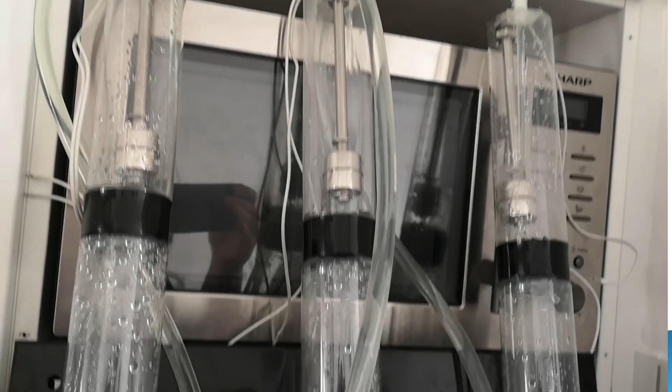Once we were in progress of building that lab, I think we were pretty much halfway already. You've seen it just in action now.

We were contacted by one of our partners, CWD in the Netherlands, and they got to talk to Rijkswaterstaat, which is the Ministry of Infrastructure and Water Management in the Netherlands. They required a model or a lab environment for their forensics team to train their techniques and develop some of the skills they need in their field of expertise. One of the things they do in the Netherlands is operate bascule bridges, for example. So this was a prime example for us to use as a model, because it's something we can get an idea of how it's working.

The strict requirements were having a mobile solution, because they wanted to move it between sites. And then, of course, come with a workshop that is scenario-based. So the bascule bridge we were meant to build should be used in a way that is versatile enough to run different scenarios for different forensic teams, for example.

And this is where the journey began of building this bridge. Moritz is going to run you through the concepts and the details of how we came to the model we currently have. As Nico said, we now changed from the first context that we had in the first scenario, water treatment plant, to the bascule bridge.

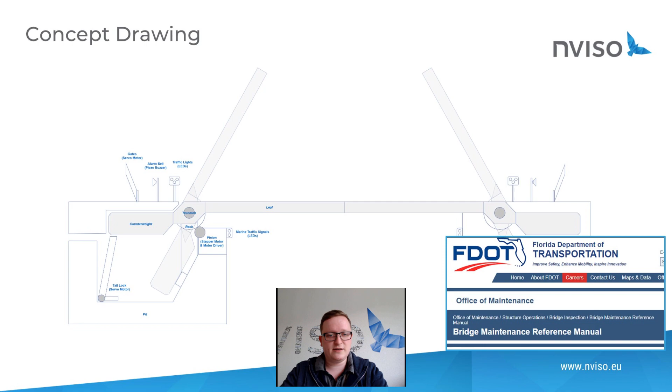Here you can see our first 2D concept drawing that we came up with. We basically have two sides of a bridge. They both have a leaf, a counterweight, and a ground. On top of the road, we also have some traffic indicators - a traffic light and road barriers that should actually block some cars from moving. So we had this idea, and we then transferred it to a 3D concept.

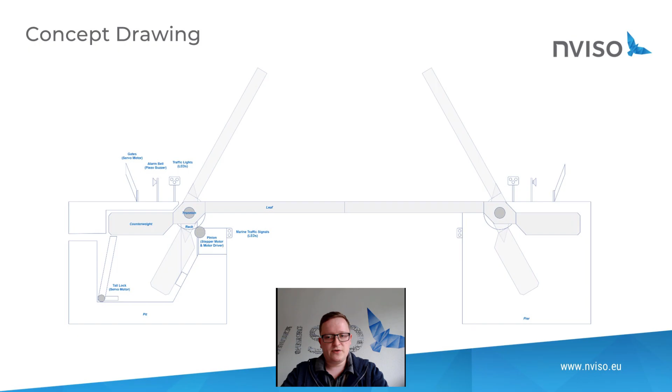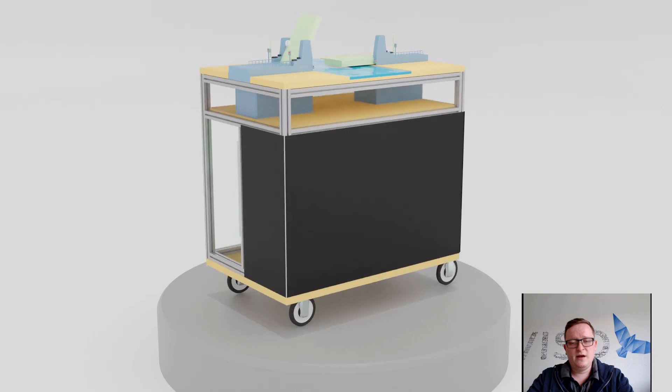How were we going to build this? Here you can see a brief, simplified representation of our 3D concept. We got an aluminum frame on wheels, divided into two parts. In the front you have the OT components mounted onto a steel plate, and in the back there are black wooden panels, with space for a virtualization server that we can use to host different networks and systems. On top we have our 3D model of the bridges that we transferred from the 2D concept drawing. Well, we had this, but we wanted to build it.

So we did this using the lovely magic of 3D printing, and due to COVID we couldn't do this in the office. We wanted to do quick iterations though, so we had to do this at home, in my kitchen actually, much to the dismay of my wife, to be honest. It was noisy, it took up a lot of space, but it was worth it. It was really cool.

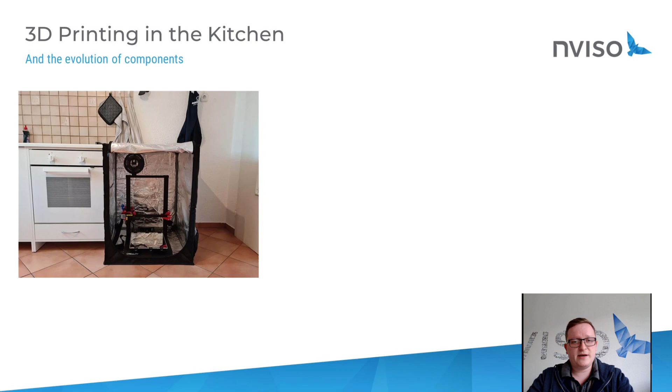So what did we do with that? Well, we started working on the mechanical challenges. Here we can see a very simple axle holder, where we got a bearing that is mounted between a clamp, more or less, fixed with some screws. Here are actually two iterations of the same part, and this presented some challenges to us.

One challenge was, if you want to use screws, how big should those holes be? Because you don't want the screw to just fall out again because it's not tight enough, but you don't want the plastic to break because it's too tight. Also, you need to find out how you can hold other parts with 3D printed parts. So we had to figure this out.

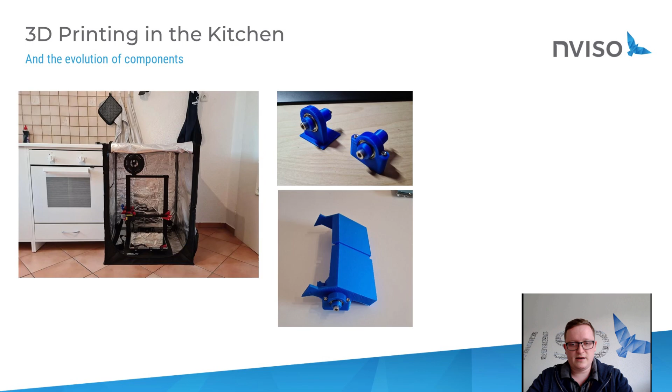Once we did figure this out and were satisfied with the results, we could proceed with other challenges. So how would we print two of those axles and connect those to something in between that can make use of this axle? What you can see here is more or less the center part of a bridge leaf. We also wanted to control this, so we had to attach some kind of stepper motor to it, and engineer some gears to attach. This took quite some iterations, but we got it really, really nice.

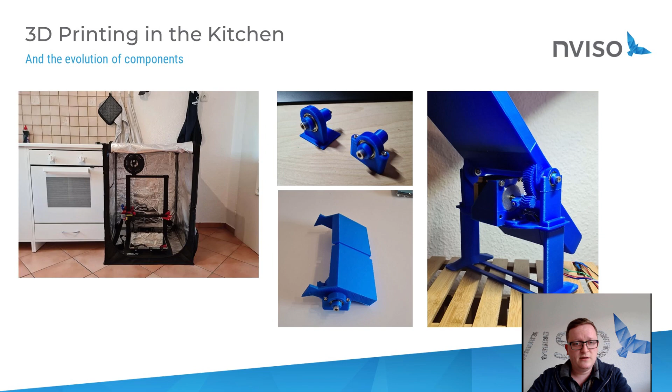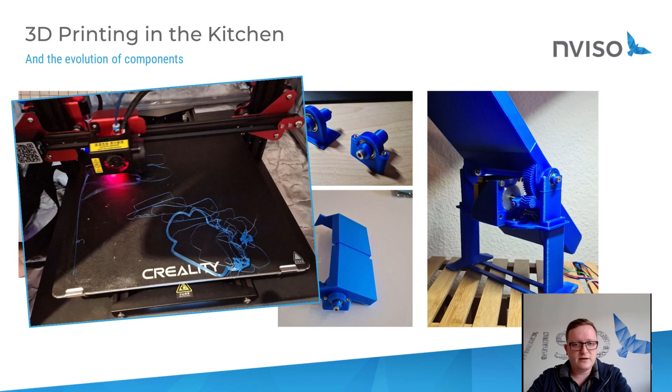But when you 3D print, you will run into problems, and so did we. One of our problems was just the infamous spaghetti print. This is just a result of very poor bed adhesion, as we learned. We solved this by using a mirror as a print bed, and it turns out that this greatly increases bed adhesion.

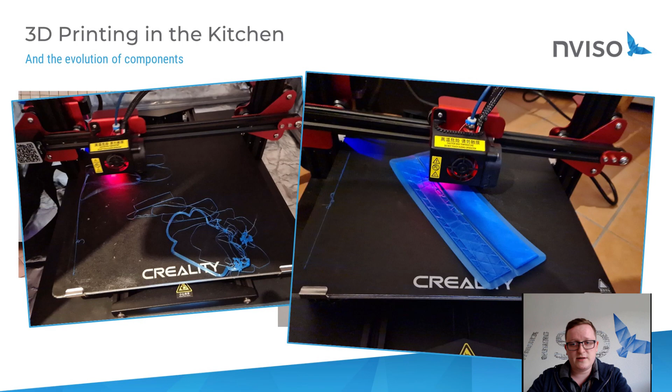Another problem was warping. A 3D printed part just cooled down mid-print, came loose, and went places. Turns out if you maintain a steady and constant temperature in the environment, this will probably not happen. So what we did was get a nice and big enclosure for this 3D printer.

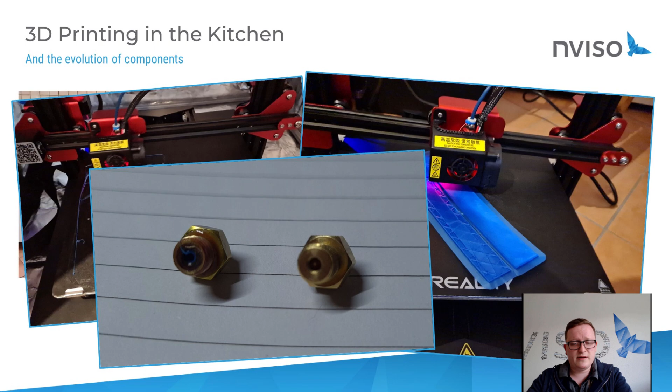We also did some tests with ABS and PLA and found out that especially if you mix and change between those filaments, you will run into problems with your nozzles. So just changing them may help mitigate the problem of irregular extrusion of filament. And this was really a problem.

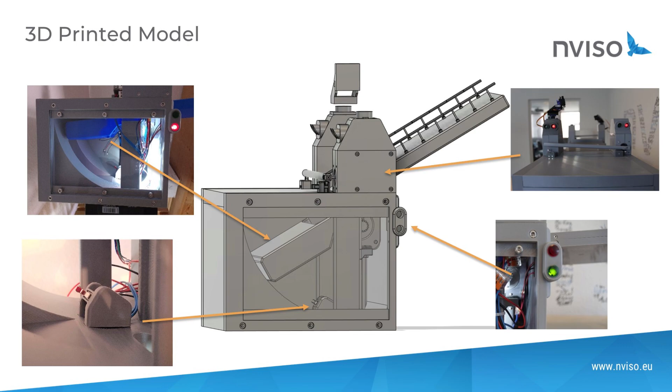But eventually we got to a point where we could easily and steadily print new parts. Here you can see our CAD model of our vision of what the bridge should look like, and actually some printed parts of it. Those were very nice wins once we had those and once we could assemble them into a full model. And this is our full model.

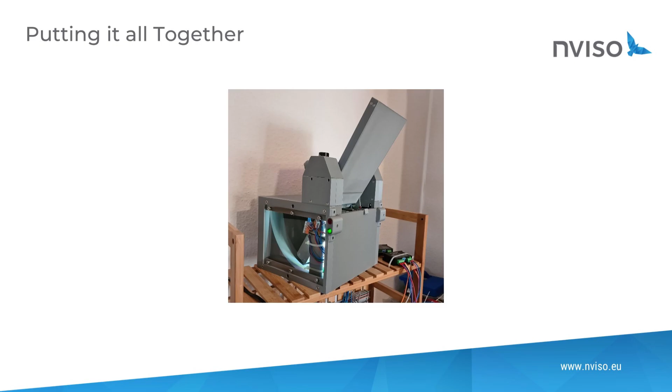But what do you do when you have this full model? Of course, you have to put it all together, and that's what we did. So we got this full model - actually we built two and printed two, which took hours and hours and hours. But then, of course, we had to assemble it into a finished, complete, usable and mobile ICS lab.

So what you can see here is our aluminum frame structure with the metal plate for the ICS components built onto it. Then, of course, we installed the OT components onto it with an awful lot of wiring, to be honest.

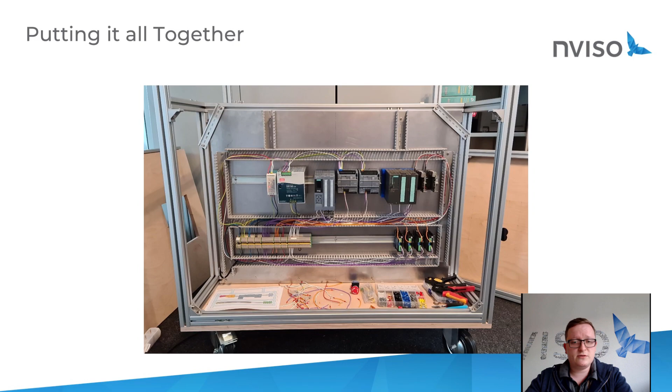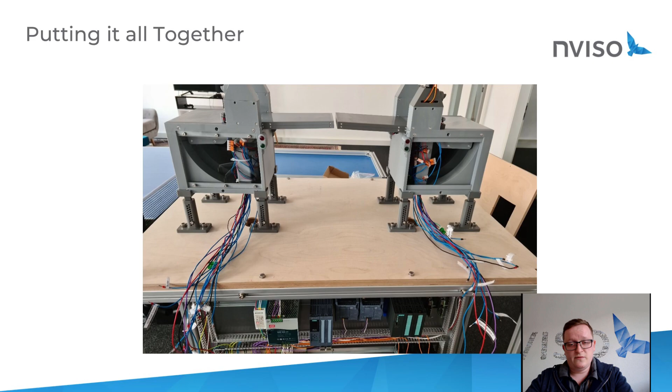Then we just installed the 3D models on top of it, using some spacers that we printed and designed, bolting those to the wooden plank there. And just for fancy points, we added those panels, also so that you cannot reach into it during operation, of course, but it looks fancy, in my opinion.

And of course, you need some lighting, right? Because if it's not very, very bright inside, then you also want to have some lighting in there so you can actually take a look inside. Or else it's really going to get really dark in there.

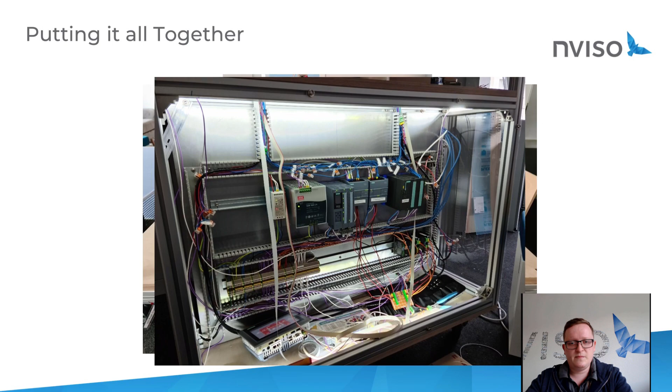And then, lastly, we did a lot of debugging, both software and hardware, and this ate up a lot of time. So if you want to build something similar, just plan ahead of time that you will use a lot of time for debugging. Stuff will break, and this will take a lot of time to fix.

Let's go into detail about the components in there. First of all, maybe most importantly, we've got the HMI for the bridge control. This represents all the movable and controllable parts of the bridge model on top. So for everything like the lights and the movable parts like the bridge leaf and the barriers, you've got individual controls that display their current status, color-coded with text.

That's nice to have. We pre-programmed it so that you can tap onto them and control the whole setup using just the HMI. Of course, this needs to be powered.

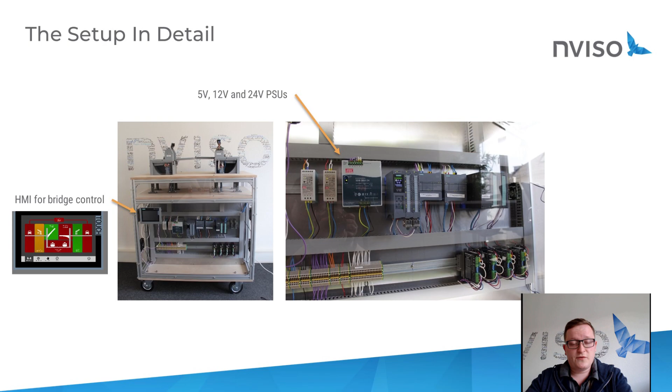We've got power supplies for 5 volts, 12 volts, and 24 volts. These power our PLCs. Here we've got a big S7 1500 PLC that coordinates the other PLCs. We've got the S7 1200 PLCs that drive all of the motors, and the S7 300 PLC, the legacy PLC that controls the lights.

An awful lot of the wiring was due to the motor drivers for the leaves and barriers, and if you could see the insides of those cable tunnels, you would be shocked to see how much cable fits into such a small place. Last but not least, we also have some Raspberry Pis for the CCTVs that are mounted on top of the bridge model.

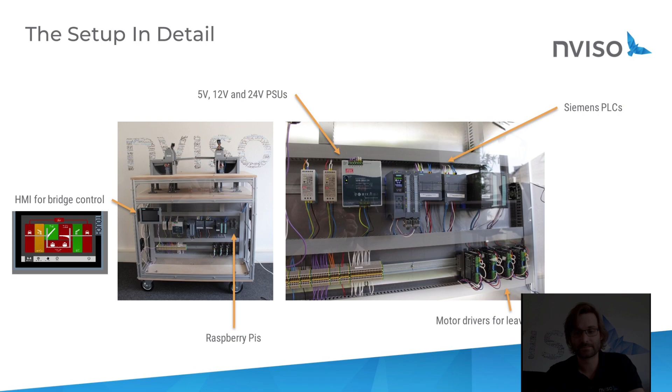Now, having the 3D model printed and all the wiring done already with the OT components, the next step in that process would be the entire IT infrastructure in the back. As you remember, the idea of this lab is also to have it for workshops, specifically for forensic workshops. So we do need that simulation of an enterprise network, for example, and a SCADA network, to realistically work on attacks that might have happened against a bascule bridge, to then investigate what was going on in that case.

In that model, there is space for a virtualization server, and what we did is deploy this infrastructure on it for that IT infrastructure part, comprised of the enterprise network, where we have a domain controller. We also have office workstations and a visualization server, which then gets its data from a historian that is running in the SCADA network, shown at the top of this slide.

In the SCADA network as well, we have the operator workstation where we can observe and supervise the bridge and check the status of the PLCs, for example, but also control it remotely via the HMI. We get access to the camera feeds of the CCTVs.

Next to the operator workstation, we have the engineering workstation where we have TIA Portal deployed, the tool to deploy the ladder logic to the PLCs, but also maintain the OT components as such.

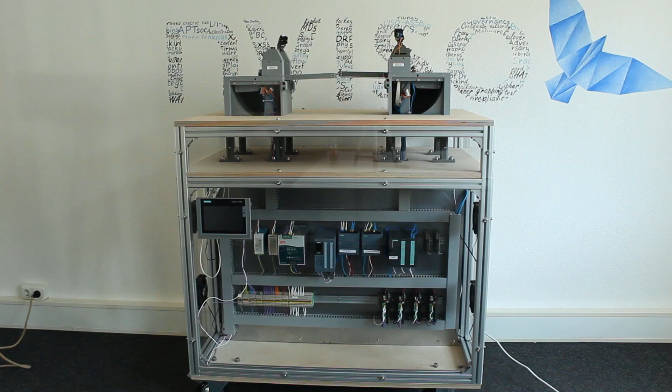This is the complete 3D model with all the OT components connected. As it powers on, you see the HMI turning on and the PLCs blinking as they boot up. They're all connected via Ethernet together, also with a server behind the steel plate you see there.

Now we should see the HMI UI being displayed in a second. There it is, and this is where the bridge automatically starts into its cycle.

This is set up for demo purposes, cycling through the entire process every 30 seconds, starting with the leaves lifting, then the lights going on for ships and boats to pass through the bridge. On the HMI's left side it's green now, meaning the leaves are open and the traffic lights are green so ships can pass.

Soon the lights will go red again and the leaves lower. Once that's done, we'll see the barriers go up, any second now.

You can't see the lights for the cars, but you can see in the HMI that they switched green as well, and now the cars can drive. This is the automatic mode.

You can at any time go into manual mode and operate any of those components manually—lift one of the leaves or the other, and the barriers, in whatever sequence you like.